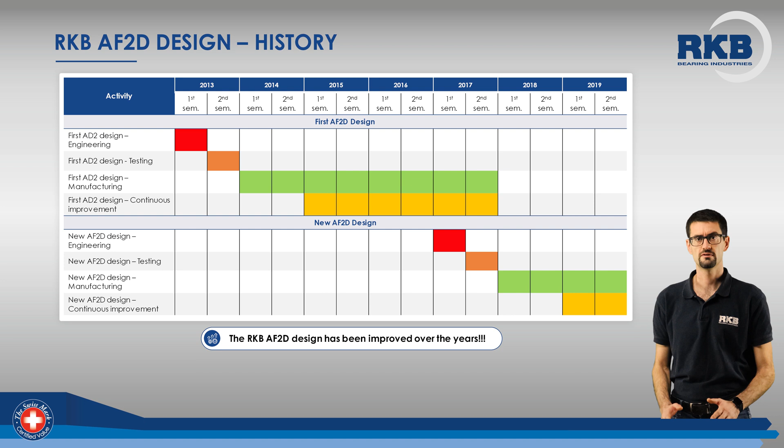In today's presentation, I'm going to show you the main features of our 4-row cylindrical roller bearings, AF2D class, which are mainly used in rolling mill stands. As you can see, the AF2D design dates back to 2013, and after many improvements and optimizations, it has now achieved a very high level of reliability. To obtain these results, our departments of R&D, engineering, and production have been working shoulder to shoulder for years.

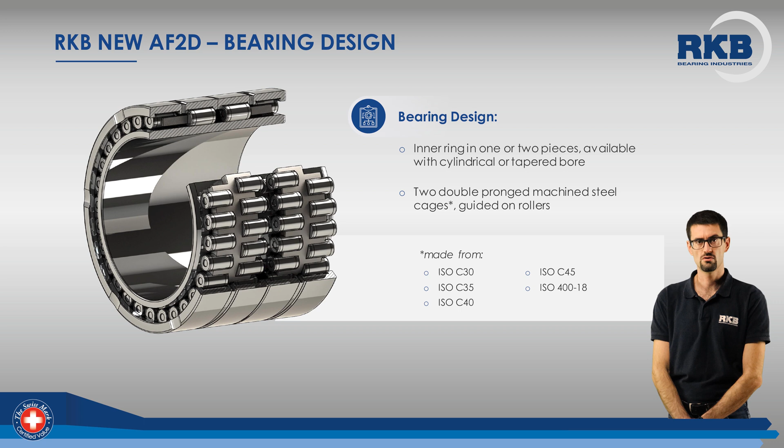The AF2D multi-roll bearings are available in different versions to meet our customers' needs. The inner ring comes in 1 or 2 pieces and can be provided with cylindrical or tapered bore, while the 2 double-pronged machined steel cages, guided on rollers, can be made from 5 different materials. The default design of AF2D includes the first outer ring, where the first cage roller assembly is mounted, the inner ring in 1 or 2 pieces, and the second outer ring with the second cage roller assembly.

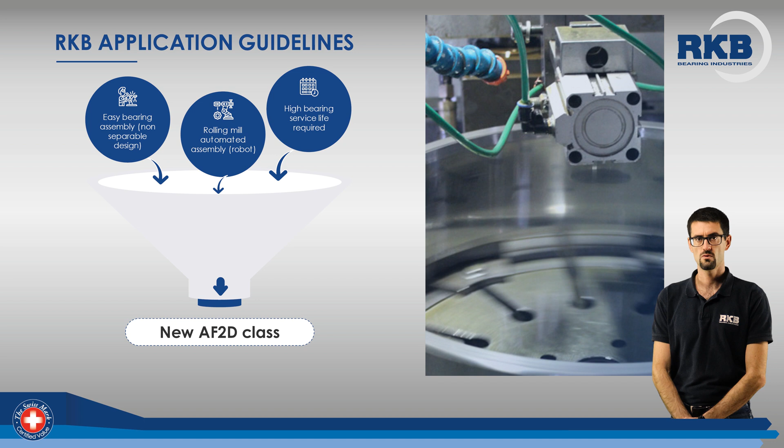We highly recommend using AF2D class bearings mainly in 3 cases. First, when you need an easy installation of the bearing and the non-separable inner ring can help you out. Second, if the assembly of the rolling stand relies on automated devices for roll changing. Third, when a long bearing life is required. Here are a couple of examples of applications where our AF2D bearings were mounted.

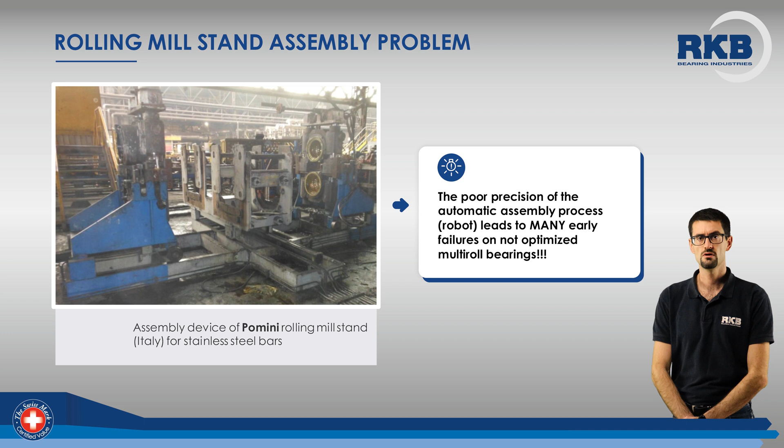As already mentioned, the AF2D bearings are very often installed with the help of robots. This kind of installation is characterized by lack of precision, which is very often the cause of premature bearing failure. Here you can see how a robot for roll changing works. The bearing outer assembly, mounted in the chock, moves axially, from left to right, toward the roll. The bearing inner ring is fitted on the roll. Theoretically, this process seems to be trouble-free, since there is enough bearing residual radial internal clearance.

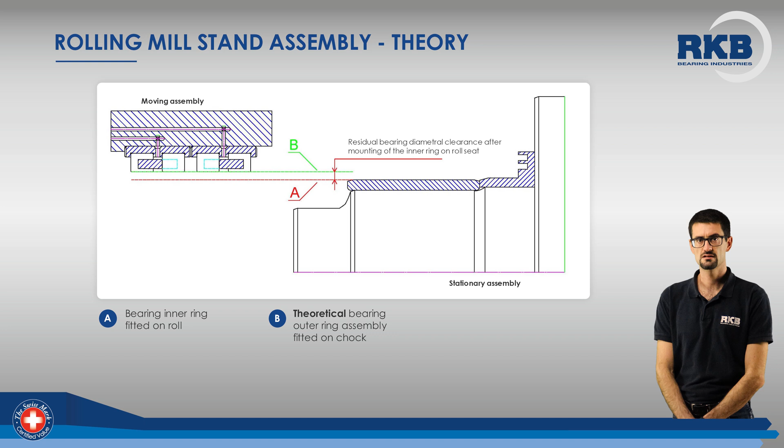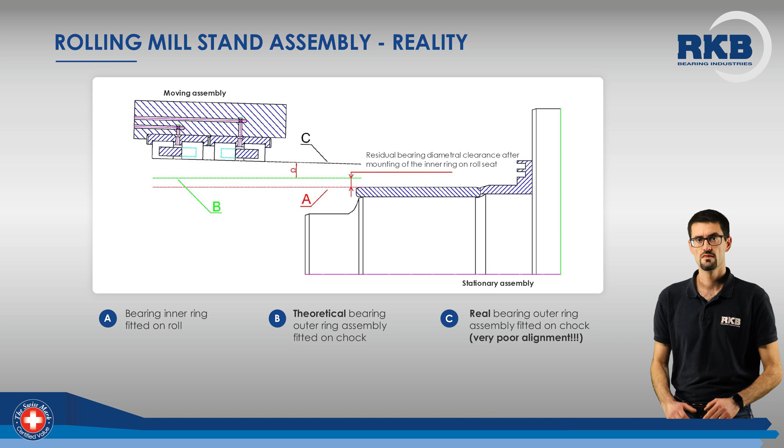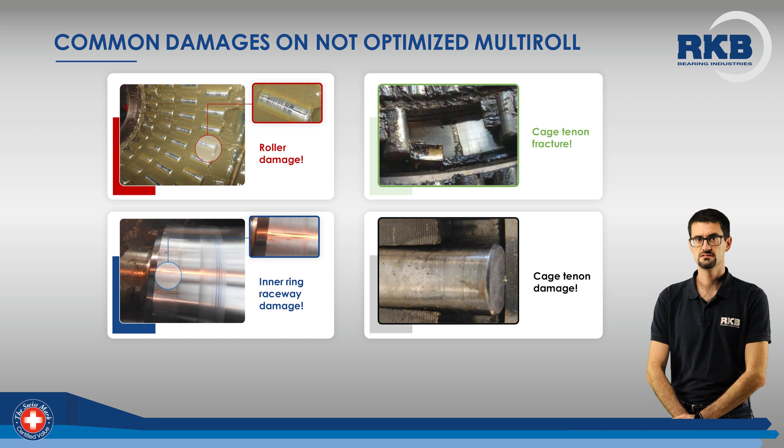However, this is how the robot works in reality. The assembly shows very evident errors of alignment and offset due to the poor accuracy of the robot. This generates impacts or interference between the parts while assembling. The most common damages resulting from this kind of robot-assisted assembly affect rollers, cage tenons, and the inner ring raceway, as it is evident from these pictures.

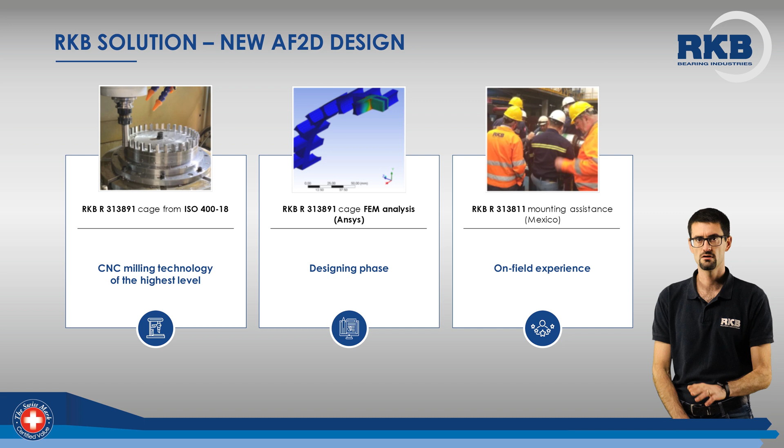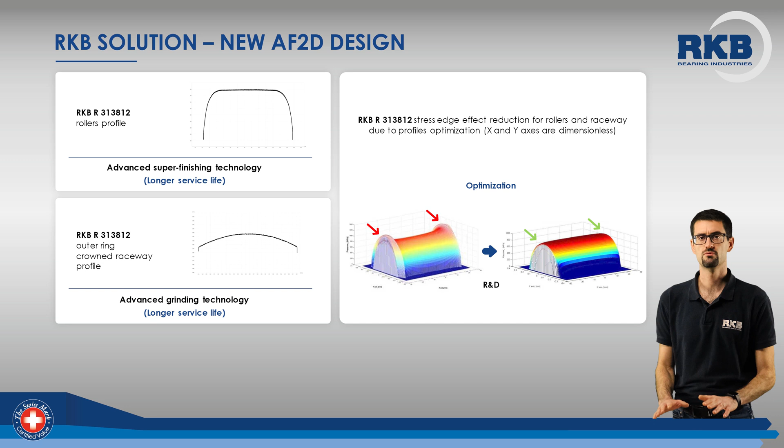To eliminate all these troubles, in 2013, RKB introduced the AF2D class bearings, which put together all the best findings in terms of manufacturing technology, design, and on-field experience. Let's start from the manufacturing technology, which involves 3 main areas, the first of which is bearing microgeometry. The top-level fine grinding and super finishing of the rolling surfaces of ring raceways and rollers results in a remarkable improvement of the stress edge effect with a pressure peak reduction.

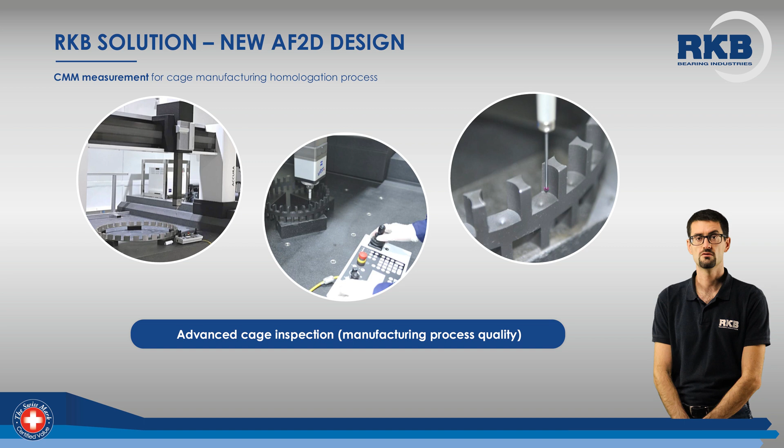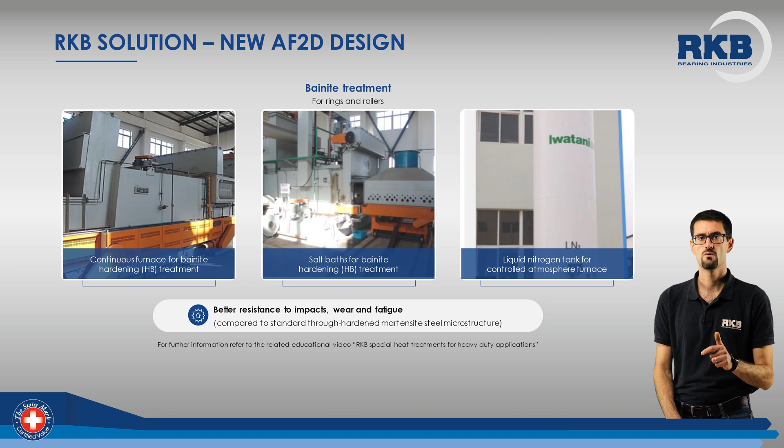The second area of improvement relates to the quality inspection of the bearing components, which is performed with the help of special tools such as the coordinate measuring machines to ensure the highest level of accuracy. The third area regards the use of the best raw materials available. RKB uses only top-quality bearing steels with the bainitic microstructure that offer better resistance to shocks, wear, and fatigue. Here you can see in detail the main advantages that the AF2D design gives to the cages in green color and to the rollers in blue color.

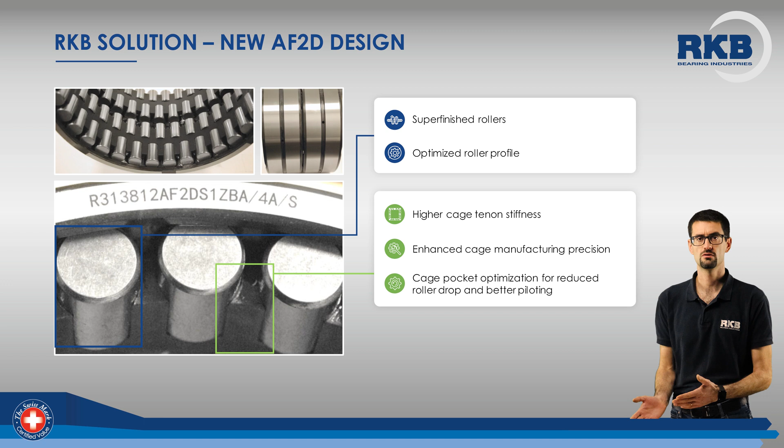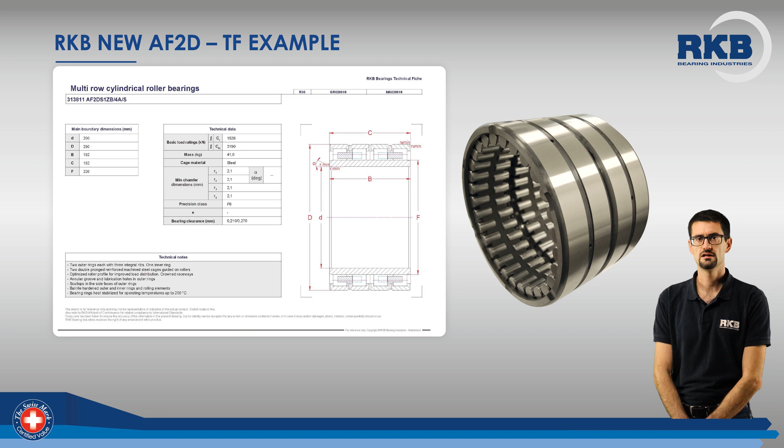This is an example of the datasheet coming with all RKB AF2D bearings. We call it Bearing Technical Fiche, and it provides the main technical details of the product. Over time, the RKB AF2D design has become a standard for many steel rolling mill manufacturers. Thanks to a remarkable increase in bearing life and a reduction in bearing assembly failures, the use of AF2D bearings allows for a sharp drop in the total cost of ownership.

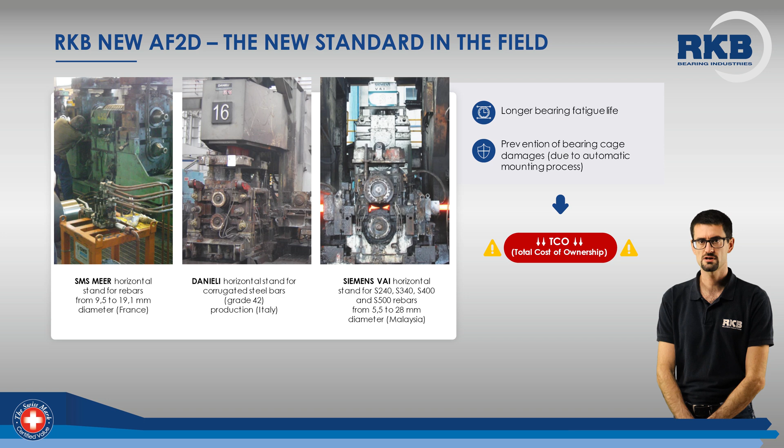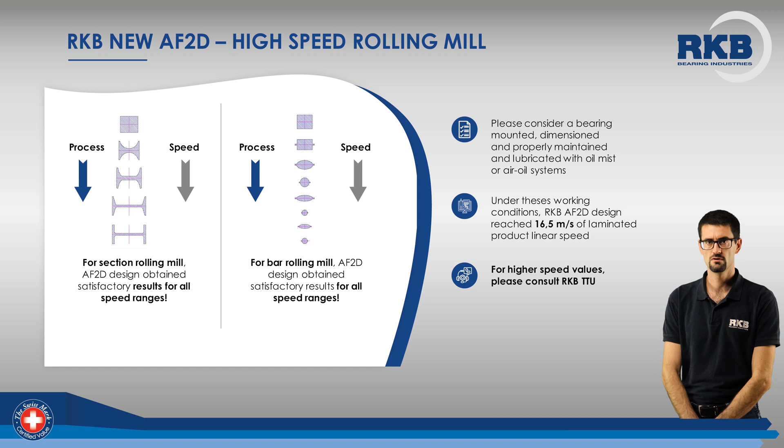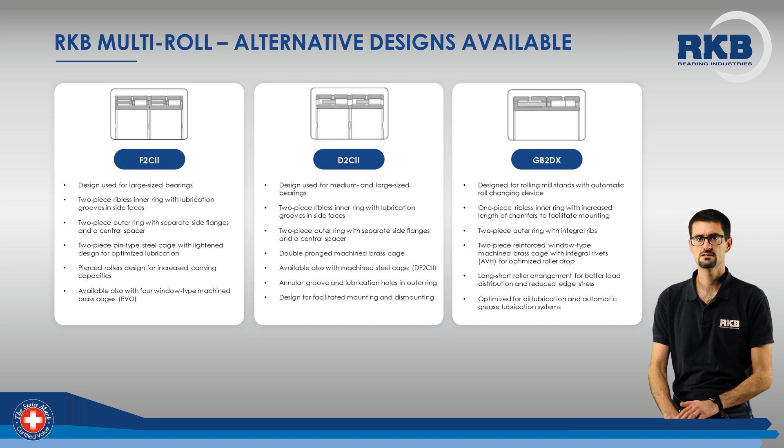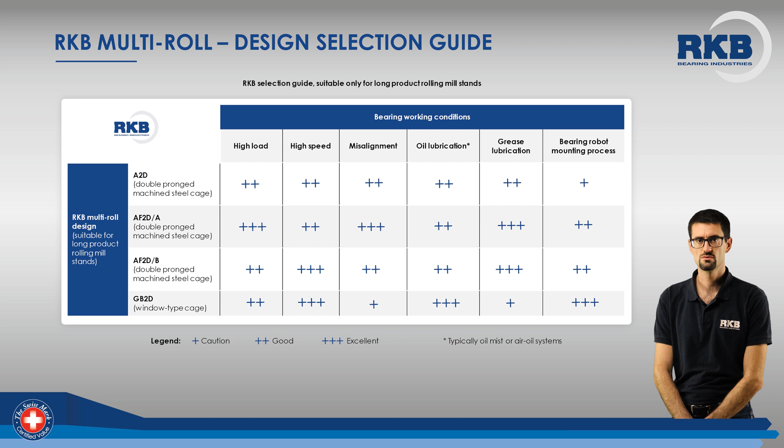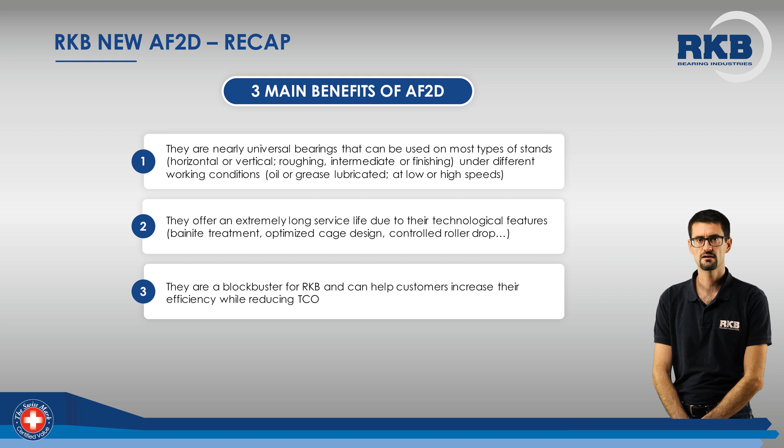In conclusion, here are the three main benefits of AF2D. Firstly, they are nearly universal bearings that can be used on most types of stands under different working conditions. Secondly, they offer an extremely long service life due to their technological features. And finally, they are a blockbuster for RKB and can help customers increase their efficiency while reducing TCO.